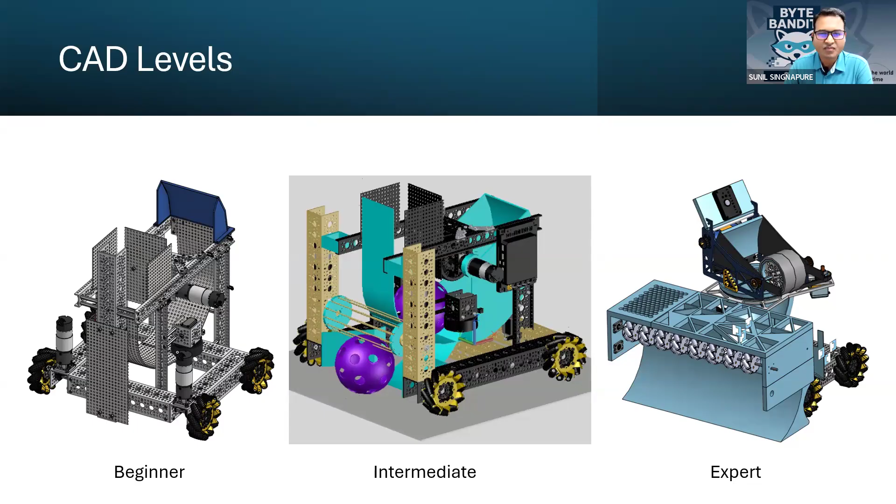So basics of engineering drawing, what it is. It's basically about the technicality, but the most important part at your level is learning to think in 3D. What I mean is, we can see 3D graphics and understand those things, but when we are developing something from scratch, which we have never seen, we have to visualize those things in our mind, like how it's going to look like, how it's going to work out, not the other way around, like, okay, let's make it and see how it's going to look like.

Of course you can do that, but that's a long way, you make it and then you realize, oh no, this is not what I wanted, or this is not what I was expecting. A lot of times it happens with teams, that they design it, but then they realize this is not something that came out the way we were expecting. So focus always on improvising your 3D visualization skills. And D is, of course, the dimension. We'll talk about what dimension means in our case.

So let's talk about drawing. Drawing is the most important part of the entire CAD process or design process, though it is kind of the last part as far as the CADing is concerned. But it is the most important part. Why? Because this is the way everyone communicates.

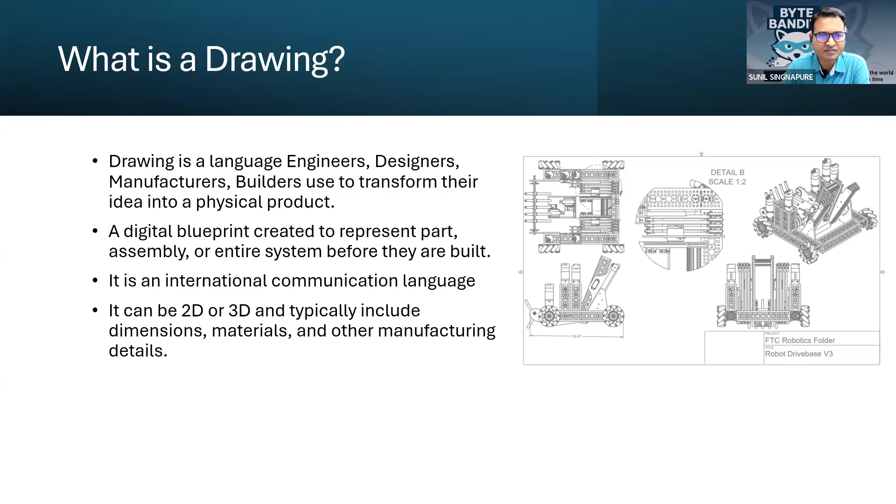I'm sure most of you, or your team, must be working on sketches, something like that. While the sketches are the most important thing, because this is the first place where anything in your mind comes onto the paper. We can have a lot of things in the mind, but unless it is on paper, it's difficult to explain to people what's going on. So making a concept sketch is very important because it is the first step.

Because if you start directly on the CAD or making the formal drawing, it's going to take days for you. But you cannot wait and then at the end of the day realize, oh no, this is not what we were talking about. So making the hand sketch is the easiest way to get started, explain to each other, talk to each other, and then go to the further detailing.

But do you think just the sketch is good enough for us to fabricate the part to make the robot as we want it? No, because it's probably not really accurate to what you might need for the actual CAD, like all the measurements and stuff. Correct, exactly, absolutely.

So the sketch is something that came in your mind and you thought of it. But when we go into the CADing, making it more detailed, we realize, oh yeah, we thought a sketch was going to work out, but when we go into the actual detail, it's not fitting with each other. So that's where the CAD comes into the picture. As a team, to expedite the 3D process, we should start with sketching, but then we have to jump into the CAD in order to get it done in the real world.

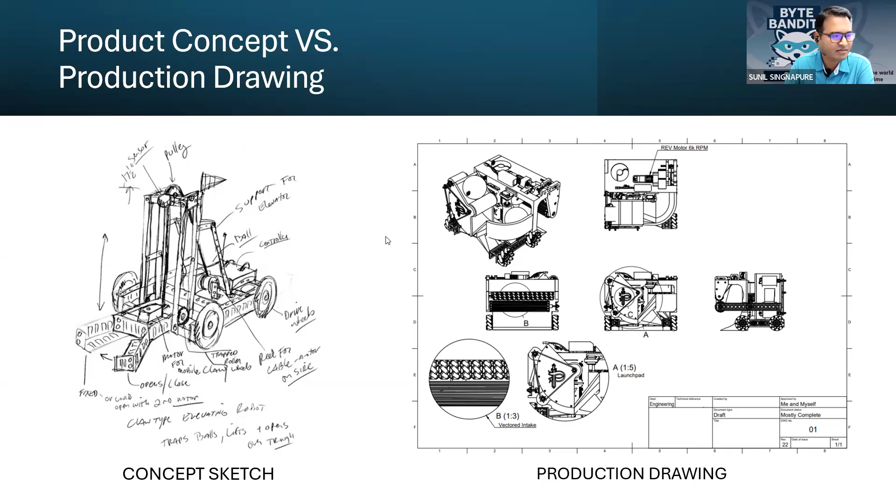Let me ask you, how many of you have heard of the Cartesian coordinate system? None? Okay, anyway, you guys must have worked on the 2D graph system, right? A lot of people must have. Depends on your grade. I think from 7th grade onwards you guys work on the two-axis, two-dimensional graph system.

So how the Cartesian coordinate system works is we have two perpendicular axes. The horizontal axis is called the x-axis and the vertical axis is called the y-axis, pointing positive towards up, negative towards down, same way positive towards right, negative towards left. The intersection of both axes is called the origin, which is 0, 0.

Now the 2D was just a flat paper, right? But in reality, our objects are always three-dimensional. So that's where the third dimension comes into the picture, which is called Z. The Z-axis is perpendicular to the XY axis, pointing plus upward and negative downwards. The same way, we mention any point in 3D space using X, Y, and Z coordinates. In this case, 3 units is in parallel to X, 2 units in parallel to Y, and 4 units in parallel to Z. So this is how we mention where the object is located.

But do you think there's anything missing with it? The other planes, if you can't guess, just... Not really other planes. Of course, those are reference planes that will come later on, we'll cover those later.

But the thing is, like if you've seen in your car, you might have seen the GPS many times, very often. So when your car is stationary, let's say you're in a parking place or somewhere, not really driving, and you look at your car itself, or sometimes you'll see in the GPS that the face of your car is not pointing towards the right direction.

The reason that happens is because it's just checking into the 2 dimension. It's not looking at the orientation of the car. Orientation of the car is determined based on the motion—it knows that previously it was at a particular location, now at this location. So which direction the car is moving, and according to that, it identifies the face of the car. Otherwise, if you're just sitting in the parking lot and you go to the GPS, very often it happens that it's pointing towards the wrong direction. So basically, the location shows you the location in 3 dimension, but it doesn't give the orientation.

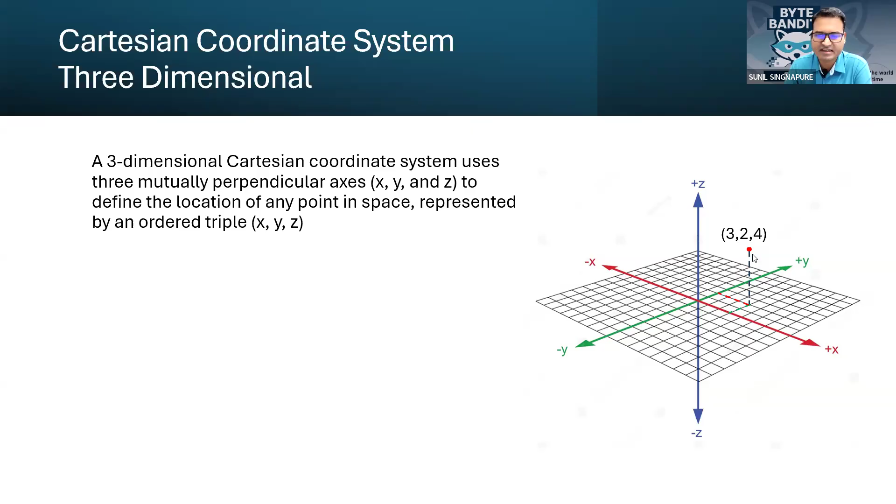And that's where the orientation comes into the picture with each axis. So these, including the orientation, make the total 12 degrees of freedom. How it makes it is right and left, 2 linear movements, same way in all 3 axes. So that becomes 6. And then along each axis, like let's say if you're talking Y, it can rotate clockwise as well as anti-clockwise, right? So that rotation, which is also called roll, pitch, and yaw, makes a 6 degree of freedom, and then linear motion as a 6 degree of freedom. That makes it total 12 degrees of freedom.

So once we know the 12 degrees of freedom, we can easily place our object in CAD. Like when we are placing it, we know what direction we need to rotate it.

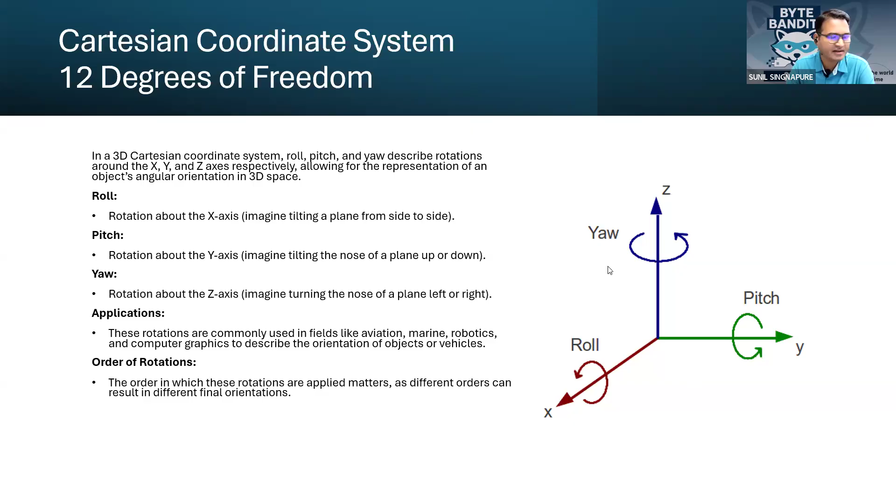So for that, let's go to the next one. A quick exercise for you guys. Can you guys identify which one is solid, surface, or flat? You guys can say it, or you can put it into chat. Just one quick minute exercise. Let me see how many of us can identify details.

Okay, I'll just move on. So give me 1 second. While you guys are thinking, let me just check chat.

All 3 look the same. Yes, they do look the same. That's correct. So what if I say that one of them is a cube, another one is a 3D surface, another one is just a 2D hexagon? You will wonder how they all look the same, right? And it does. So I'll show you some magic here. Isn't it the thing? They all look the same. Now you'll see the magic.

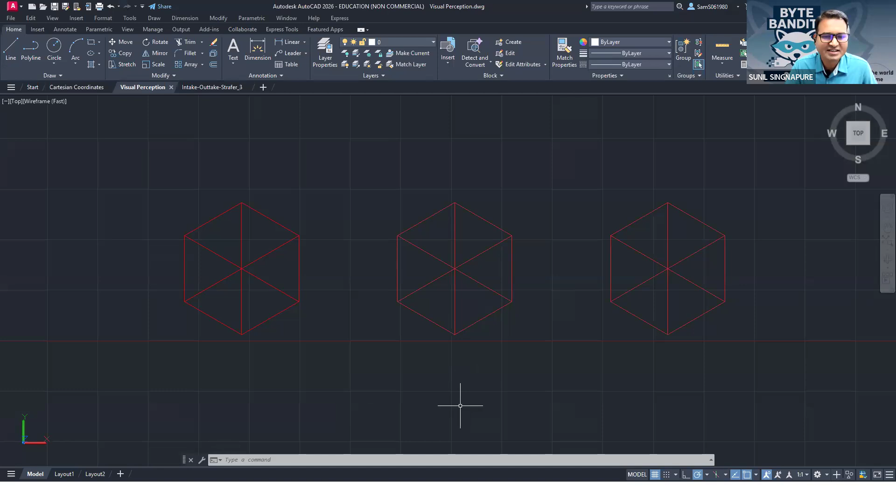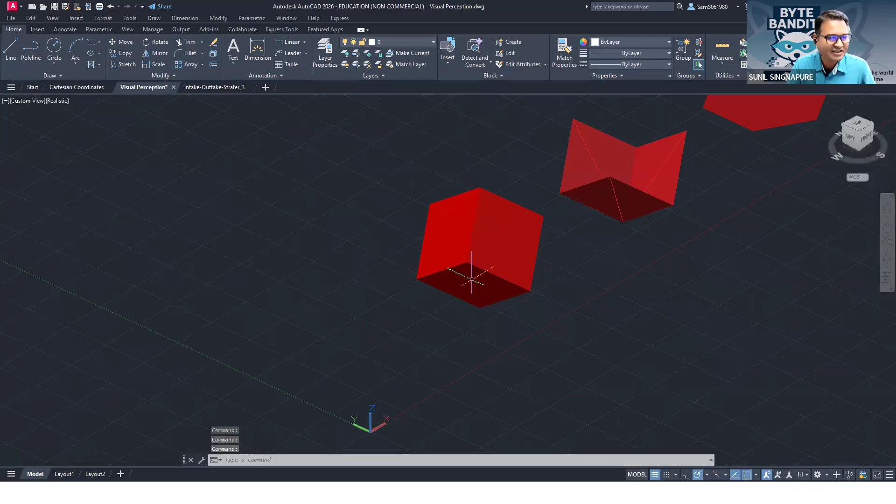One of them is a cube, another one is the surface, another one is just a 2D object. Let's give it a more realistic view. So now you'll see. Do you agree now that this is a cube? This object is a cube. This is just 3 surfaces perpendicular to each other. And this is nothing but one flat hexagon, right? Isn't it good?

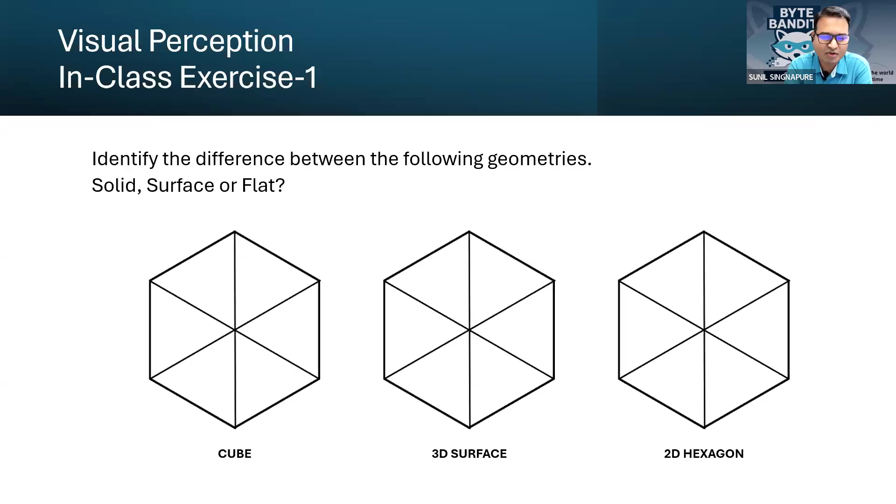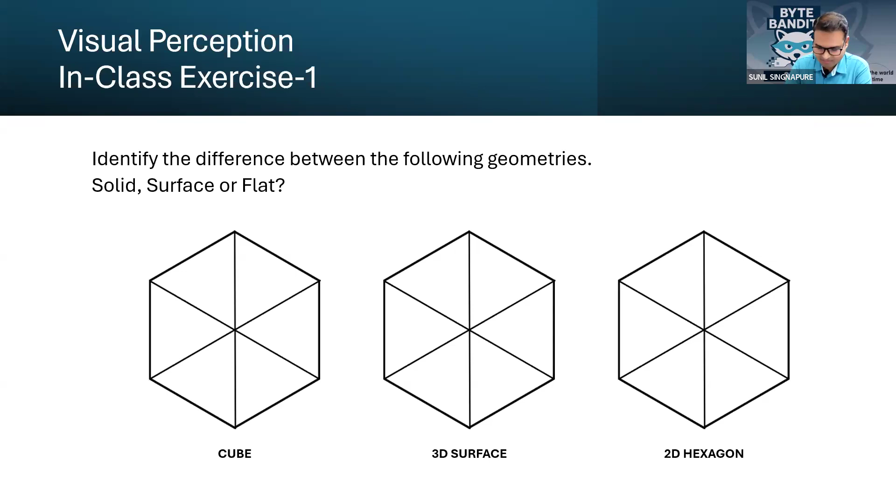So what it means basically is that our eyes need more visual clues to identify the object. Just based on one picture, we may not always be able to identify what it is, right? So we need more clues. How do we get more clues? So let's look at the next slide.

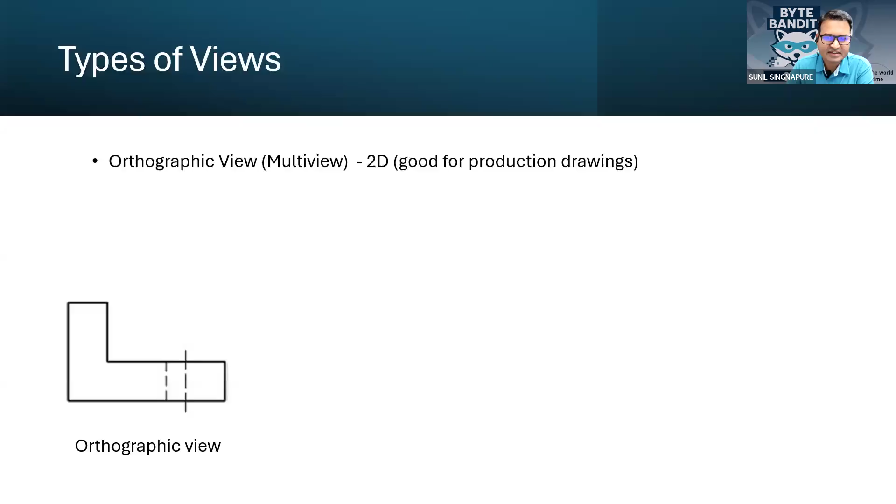So let's talk about different views. Have you guys heard about orthographic views? May not be, of course. So orthographic views are the 2D views, in the 2D plane, like we make a sketch in 2D. Then we have isometric view. So orthographic view, if you look at it, has height and width—just 2 dimensions. While if I look at isometric view, it has length, width, and height. So there are 3 dimensions given. So the isometric gives us a 3D visual effect, while the orthographic is only 2 dimensional.

There is one more, which is perspective view, similar to isometric, but you'll see this is converging, right? So this gives more pictorial views. Now, when it comes to engineering drawing, the orthographic and isometric views are the most common views. Of course, there are more than these views, but we are talking at the moment just about the common ones. The perspective is mostly used in architectural drawing to give your house a real pictorial view before it is actually made.

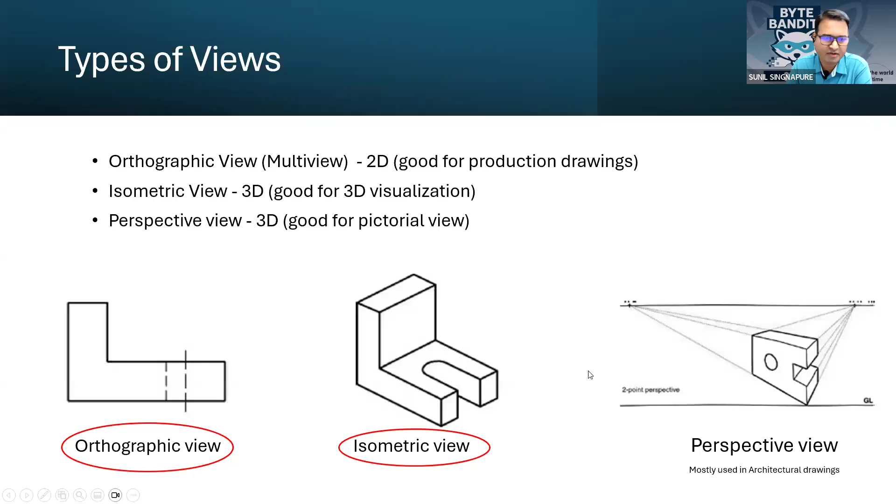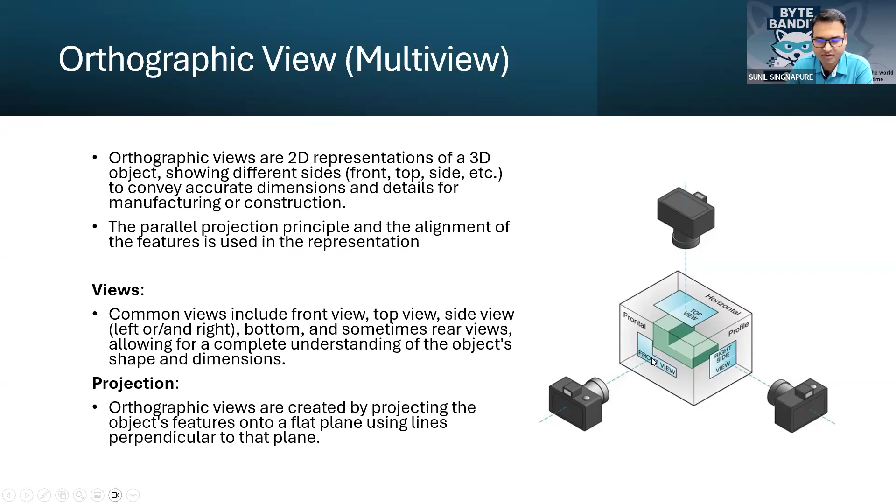These are 2-dimensional views generated directly parallel to the plane. For creating any drawing, you need at least 2 views to get the full picture, if not more. Sometimes 3 or 4 views are required.

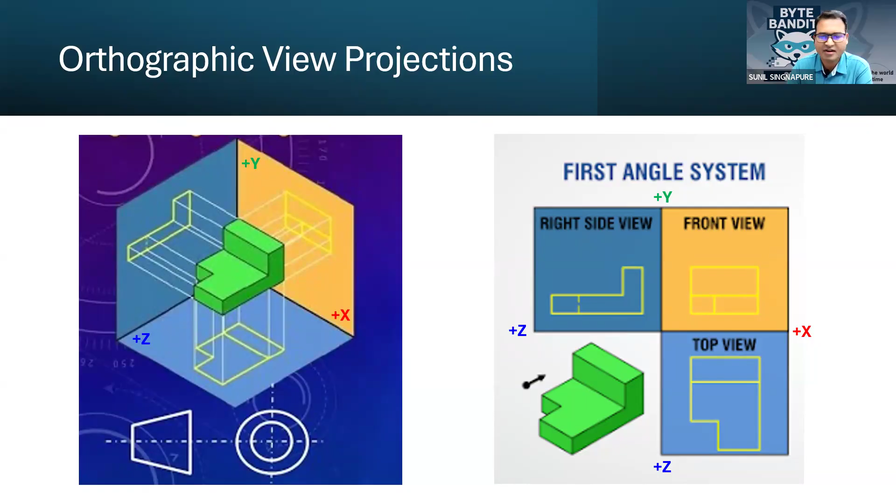Any questions anyone has up to this point so far? No? All good? Okay, great.

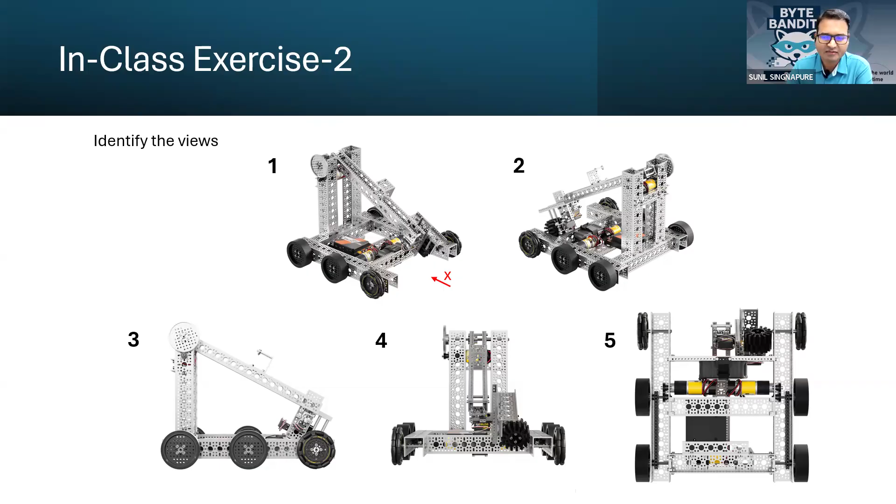The second is also an isometric view. There is more than one isometric view possible - there's northeast or isometric view, northwest, southeast, southwest, and more than that. So multiple isometric views can happen within one object. All right, great, let's move on to this.

Now, how to create these orthographic and isometric views we talked about? There is software available for it - if you want, I can tell you and you can register. It's also available for students free, but you need to register. For students who don't want to register for software and just want to practice orthographic and isometric views, I've placed a link, or you can do a Google search. You can download orthographic graph paper, which is just straight horizontal and vertical lines equally spaced, or isometric graph paper, which has 3 lines - you'll see 1 line, 2 line, and 3 line equally spaced. This is after class, you can do that.

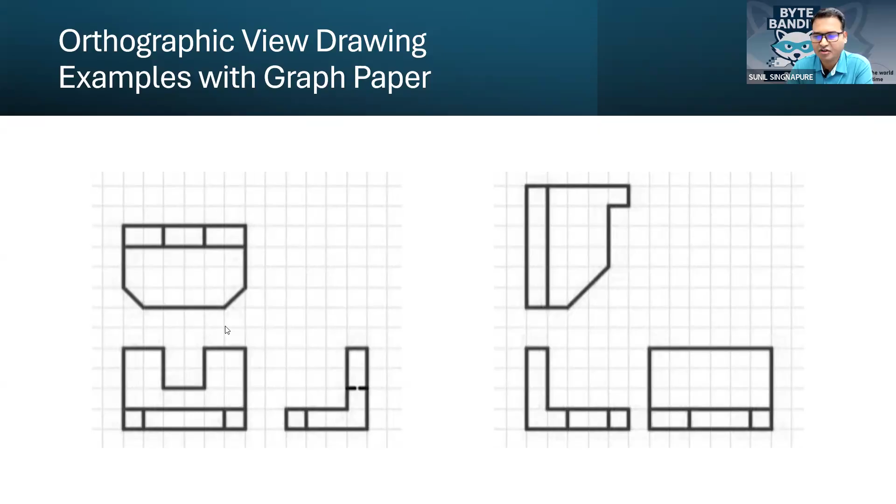So if you were to draw a set of orthographic views, this is how you can draw. For example, let's say your width is 6 - 1, 2, 3, 4, 5, 6. So this is your width, and so on. You can take a measurement, or you can go with an interval, like each square is either 1 unit, 2 units, 5 units, or 10 units, depending on the size dimensions given in your sketch. That's how you can draw orthographic views on graph paper.

Same way on isometric paper, this is how you can draw. So you can see that though it's just paper, it's in 2D, but it gives you the 3D appearance. This is how you draw. If your width is, let's say, 6 units, length is 8 units, and the height is 8 units, this is how you will draw and make a cube, or something a little bit more complex.

So these are some simple exercises I have given here, and I'll give you the copies. You can just send me an email separately after the class, and I'll send you the copy of this presentation so you can refer to it and practice it. But these are the simplest ones - you can at least get it going and practice all the different views.

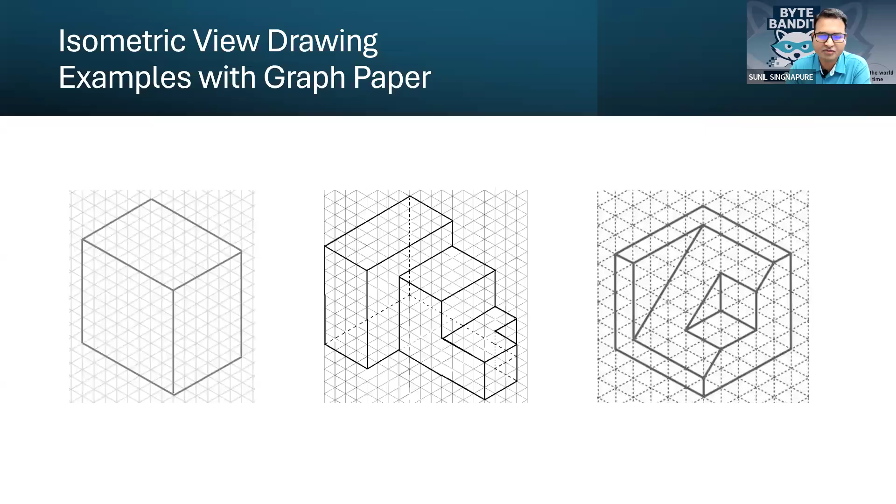Of course, we do much more complex than this, and these are the after-class exercises. Basically, you will use this ISO view to generate its orthographic views. Same way for this, and you will use these orthographic views to generate an isometric view for this. Feel free to try after class and let me know what you come up with. You can send me your work, just take a picture and send it to me - I'll be glad to give you feedback on whether it's correct or not.

So with that, the basics of engineering we have covered. Anyone have any questions so far? Is it a little bit going over your head? Are you guys with me? Was it clear for you guys?

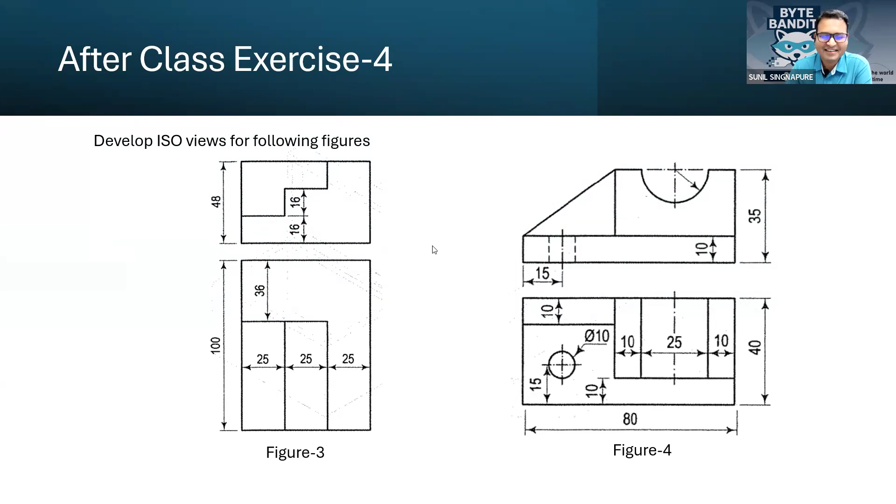Okay, no worries. So let's go to the fun part, which is Onshape.

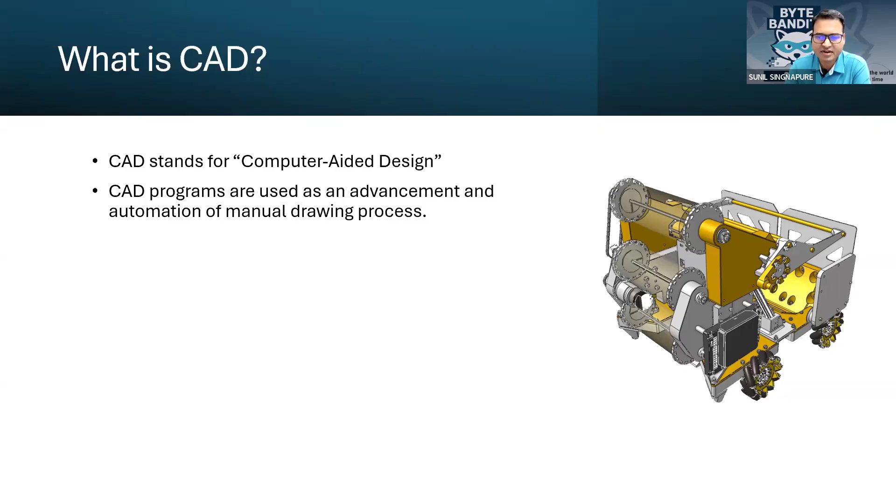So what is CAD? CAD stands for Computer Aided Design. Was CAD always there? Not necessarily - in the past, when there were no computers, there were no CAD softwares. People used to do all this on a big drawing paper. Everyone was drawing by hand - everything you draw today on a computer very accurately, everyone was doing by hand, all measurements and everything. But since computers came, there was advancement and development into CAD software, so CAD softwares came into the picture, and that's how we are doing it now.

Onshape is not the only CAD software - there are many more, like Tinkercad, Blender. These are simple go-to starter ones, and they're free. Onshape is the very balanced one in between all these things. Then there's more advanced ones like Fusion, SolidWorks. There's AutoCAD, which I was showing you just now, the 2D one - the black screen, that was AutoCAD. Then there's FreeCAD, SketchUp, and many more, countless CAD softwares. Every CAD software has its pros and cons depending on your usage - some are suitable for a particular purpose, not others. So yeah, there are many CAD softwares, but we'll just talk about Onshape now.

Have you guys heard about Onshape before, by the way? Okay, so great. Yeah, all right, cool.

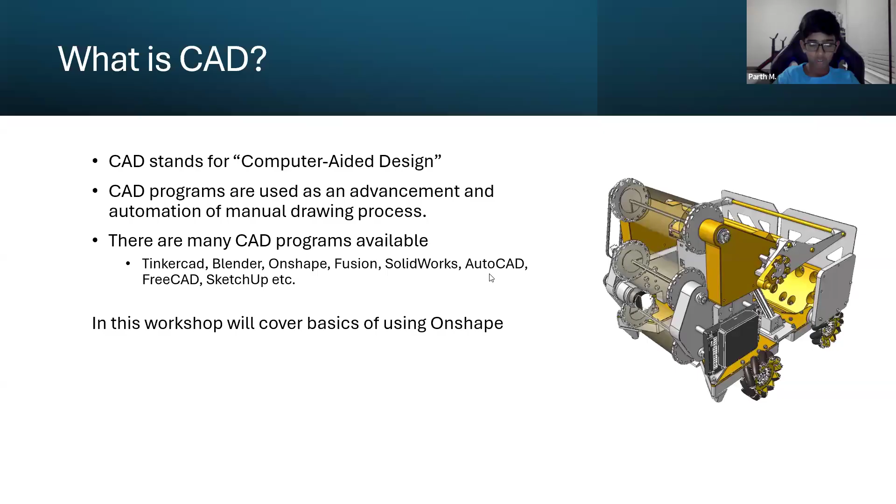So let's dive a little bit deeper into it. Why are we talking about Onshape only, not the other software? Because first thing, it's free for students or educators - all you need to do is go online, register for it, and then you can start using it. If it's professional use, you have to buy a license, but not for education and student purposes. Compared to other CAD softwares, it's easy to learn - so basically for your level, for FTC, FLL, FRC levels - there may be some FRC people here.

It is easy to learn. It's not that complicated, and it serves the purpose of what you need for your design.

Second thing, it's cloud-based. A lot of CAD softwares are desktop-based, so you have to download the file and install it on your desktop before you can use it. The good part with Onshape is it's cloud-based.

So anywhere you are, even on a long drive, as long as you have your laptop and an internet connection, you can just log in and get going.

It's so fun. Once you start playing around with it, making your own things, you will realize how fun it is to play with it. It's just the first step that is difficult, and that's where I come into the picture.

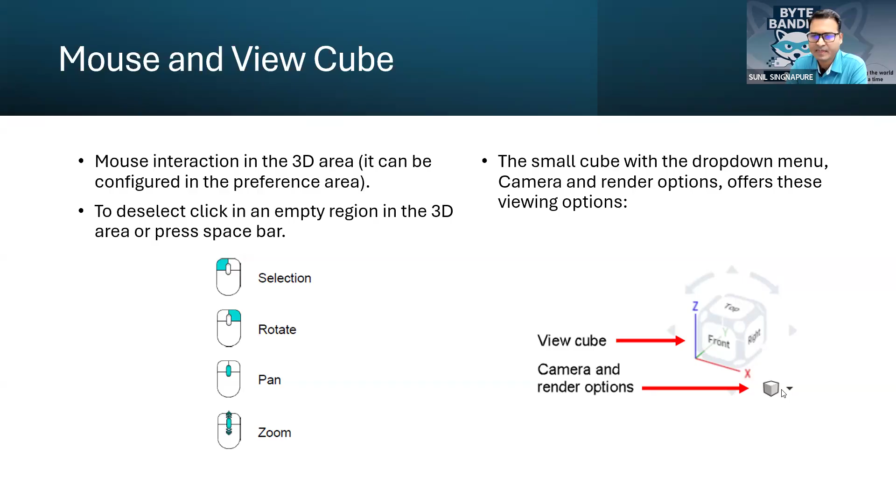And you can also see the X, Y, Z axis, which we just talked about. You can press on different areas of the cube and it goes to preset views. There are some camera and render options which we don't need to talk about, but I just wanted to give you an idea.

Someone is saying they have a mouse and keyboard for the iPad, so that's perfectly fine as long as you can use it. It's great. Just try it yourself, and if it works out, wonderful.

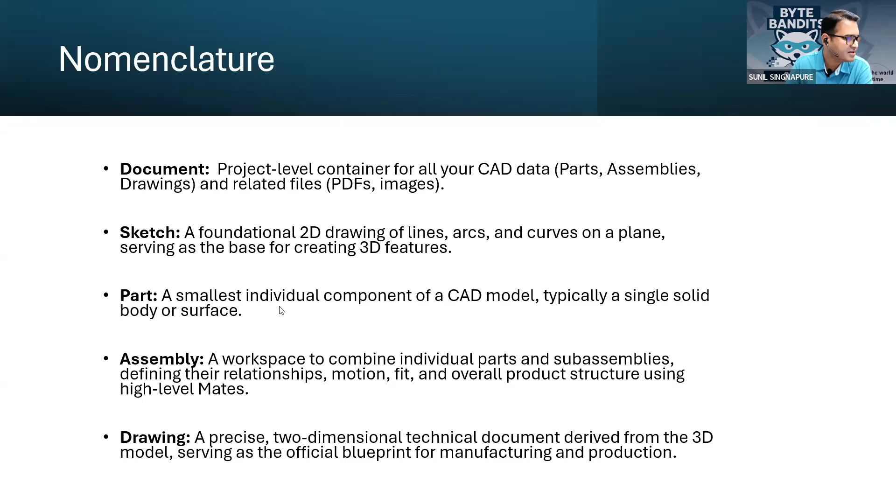Now let's look at how documents are organized. We have document level, top assembly level, sub assembly, and parts. With multiple parts, you can make sub assemblies, and with multiple sub assemblies, you can make a top assembly. For example, a robot has an outtake and intake, which could be two separate sub assemblies, each containing multiple parts. You can also import parts from public libraries or from other parts of the robot instead of making them yourself, if something already exists.

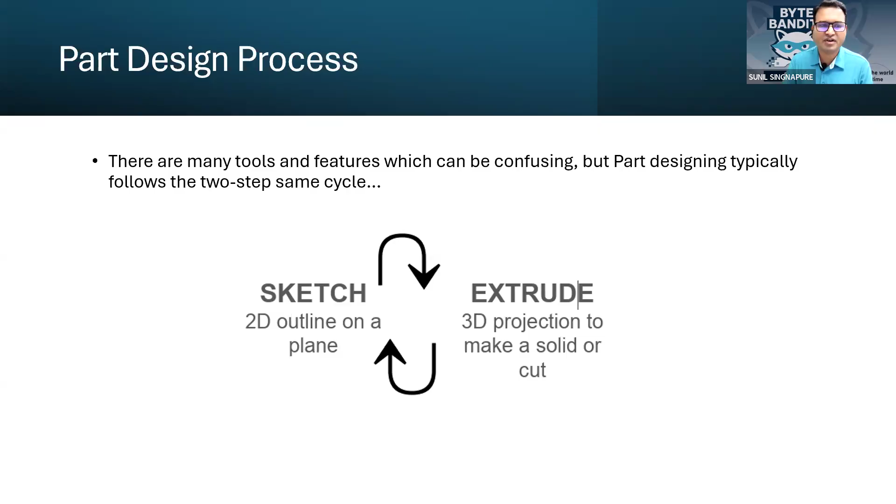Now let's look at how part design works. I'm going a little fast, but this is just an introduction because I want you to work on it yourselves. One part can have different solid objects or solid surfaces. The way it works is you keep making different sketches and extruding them within one part—sketch, extrude, sketch, extrude—and that's how you build the part.

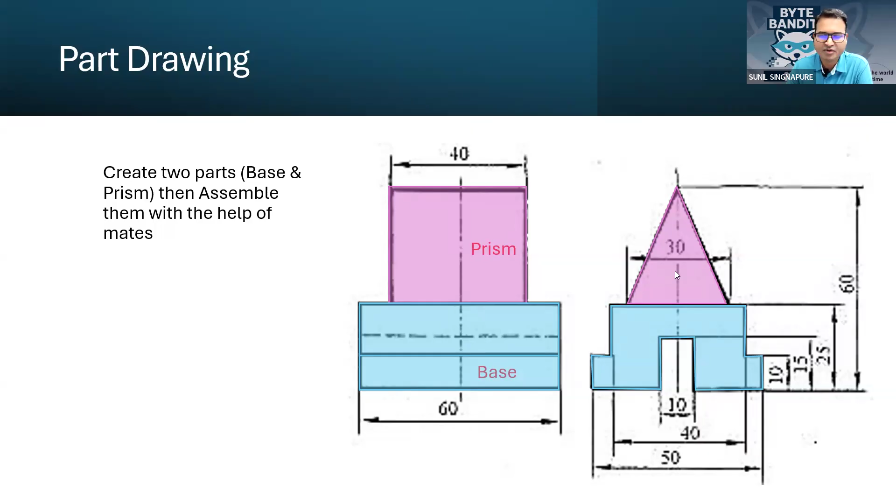So what we are going to do is a very simple exercise, simple even for a beginner. All we are going to do is create two parts: one is this triangular prism, and one is this blue base, and then we are going to assemble it. Let's move on to it.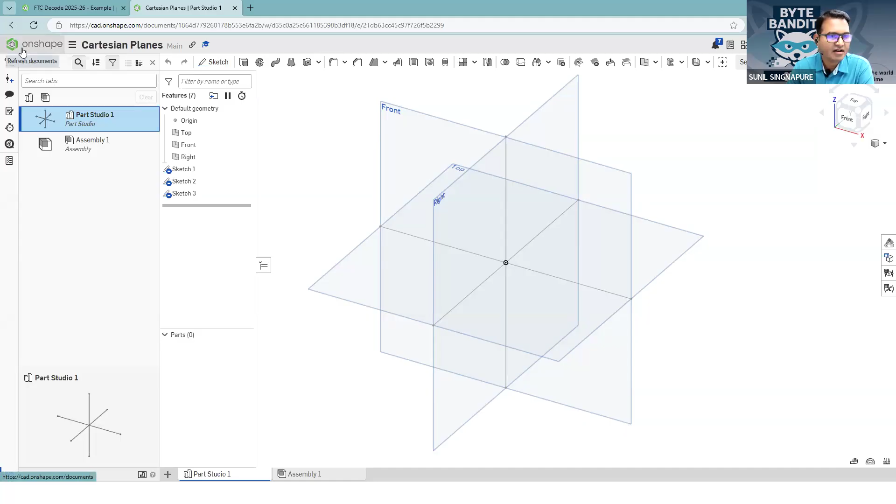First, just click on the Onshape icon and click create. Use the drop down arrow, click create, then click document. When I click document, this comes up, and you can create that document in different workspaces—I'm creating it in 'owned by me' this time. You can give it any name, let's say 'class exercise', then just hit create.

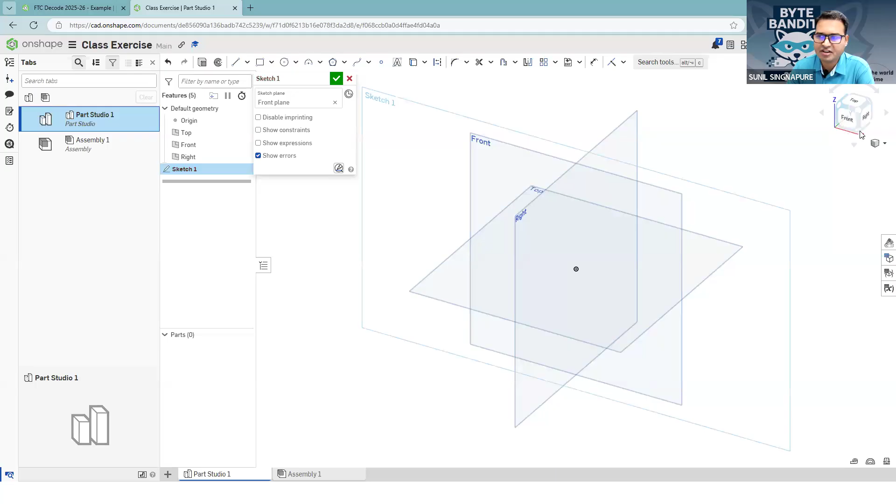Let's move on. We just talked about this sketch, right? This was the sketch toolbar. So let's go back, and the simplest thing we're going to start with is the prism. Let's click on sketch, and it asks you to select the plane. I'm going to select the front plane. For quick navigation, on the view cube you can just click on the front view—there are shortcut keys to directly activate that plane, but I'm using the cube intentionally so you can see what feature I'm using. So you click on it, and then start making your triangle.

We're going to use the line command for this. Let's start from here, click, and just go random—you don't have to be precise—close the triangle. As per the exercise, the base of this triangle is 30, and the height is 60 minus 25. Let me pull this up for you to look at quickly: the base is 30, and the height of the triangle is the total height, 60, minus 25, which makes it 35. So the height is 35.

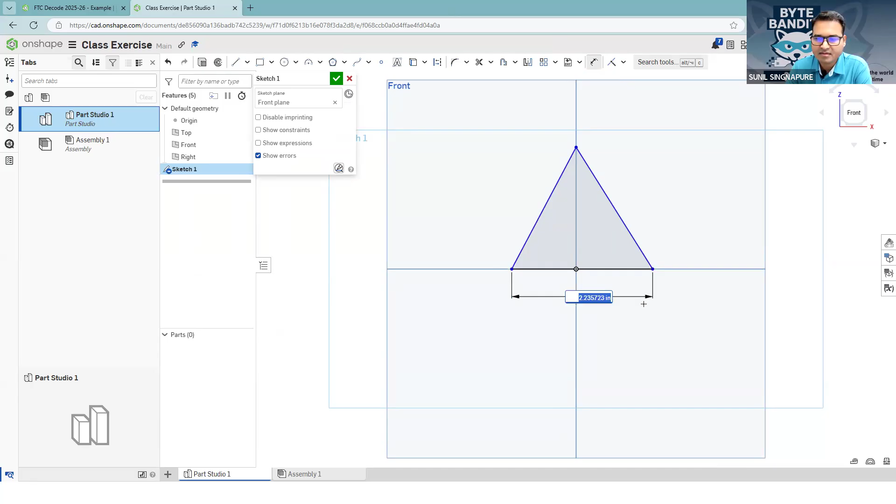So we're going to use the dimension tool. Just make it 30. Then use another dimension, make it 35—it may not be equal on both sides, so I'm going to measure from the center to this point. Oh, that's why it's not picking up. I can make it equal.

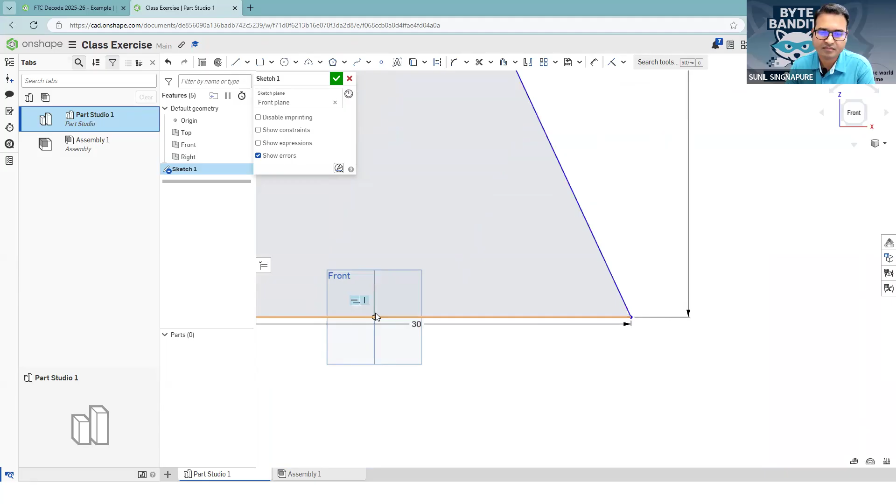So you guys have your triangle ready? Let me know once your triangle is ready. Once it is ready, what we are going to do is just click the green check mark.

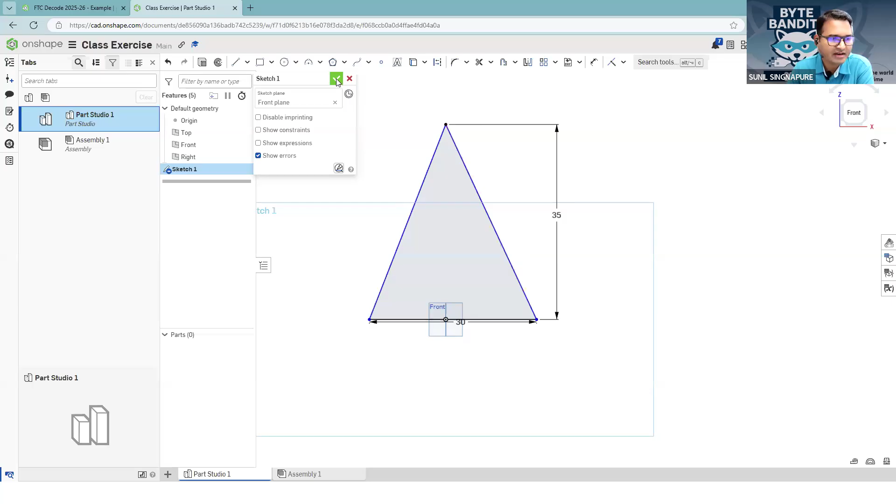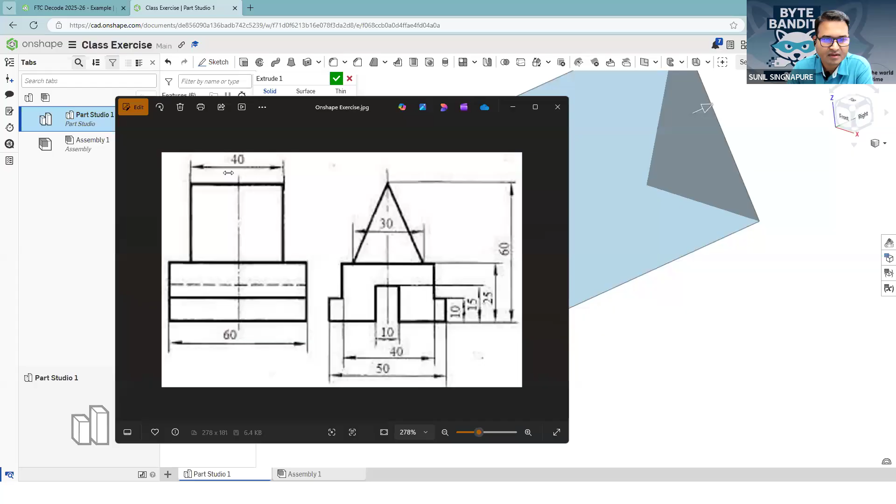Okay, and then I'm just going to tilt it with my right click a little bit, so you see the flat triangle. Then I'm going to use the extrude command. Select my sketch, it shows this direction, which is fine, or I can change the direction like this. Use the length of our triangle, let's look at what it is, which is 40 in this case. 40, okay, not 60, I was typing 60.

It's 40, okay, so that's it. If I want, I can rename this triangle as a prism, so this file as prism, but I'm just leaving it for now. Then just click it, this. So if you're able to make this one, congratulations, you just made your first object in Onshape.

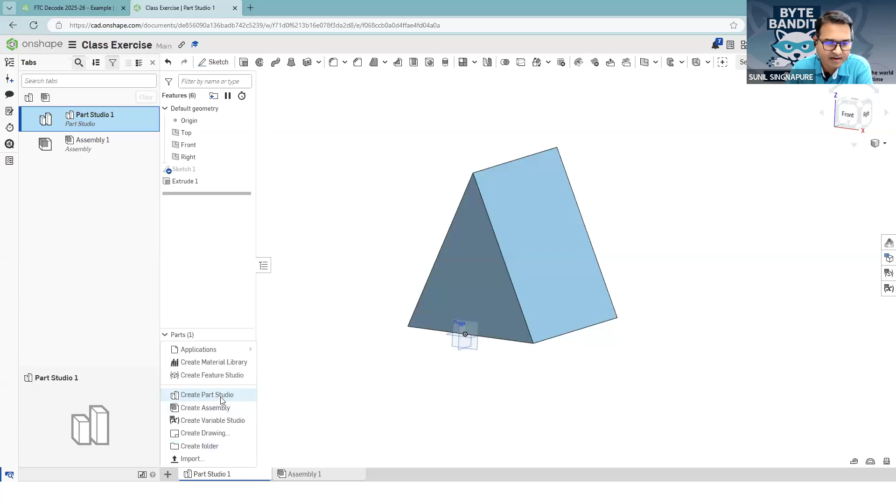Now what we are going to do is go to another part studio. Just go and create another part studio, because this is one object. Now we are going to the second one and we are going to make the base. Again, just keep in mind the shape of it. I'm going to go the same process. Select this front view and then draw the shape.

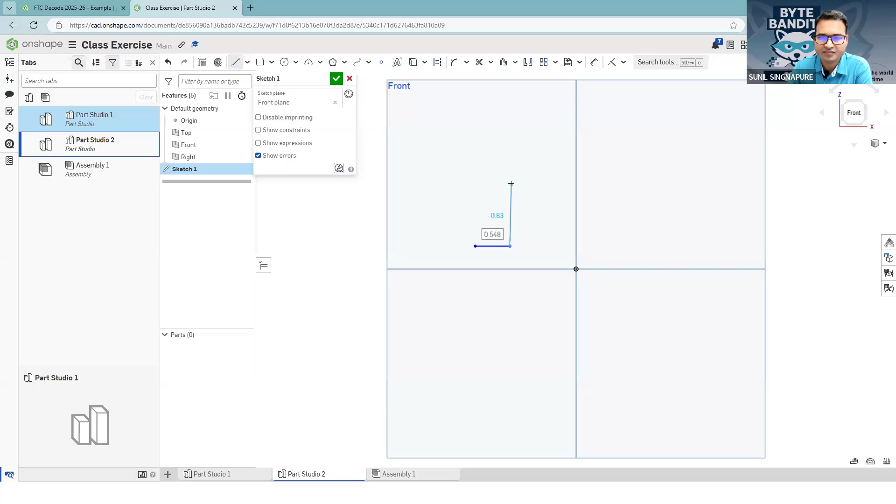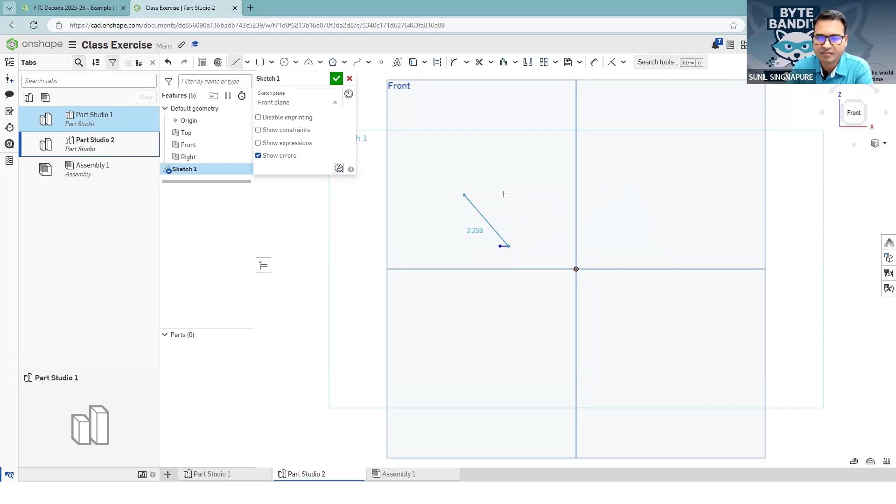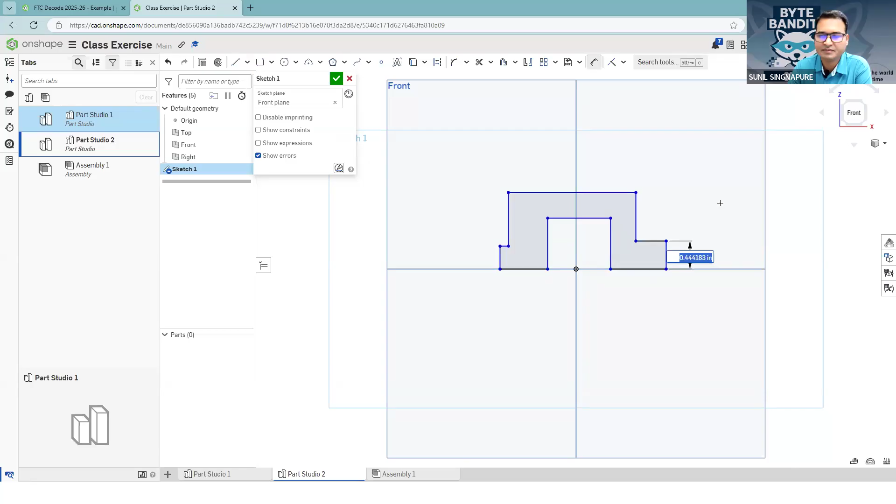So let's say I start from here. Oops, sorry, I made a mistake. Okay, same way we are going to just give the measurements. There are a lot of shortcut ways, but I'm intentionally following the long way for you guys so that you can understand. So we have this is 10, 15, and 25. So that's what we are going to do, 10.

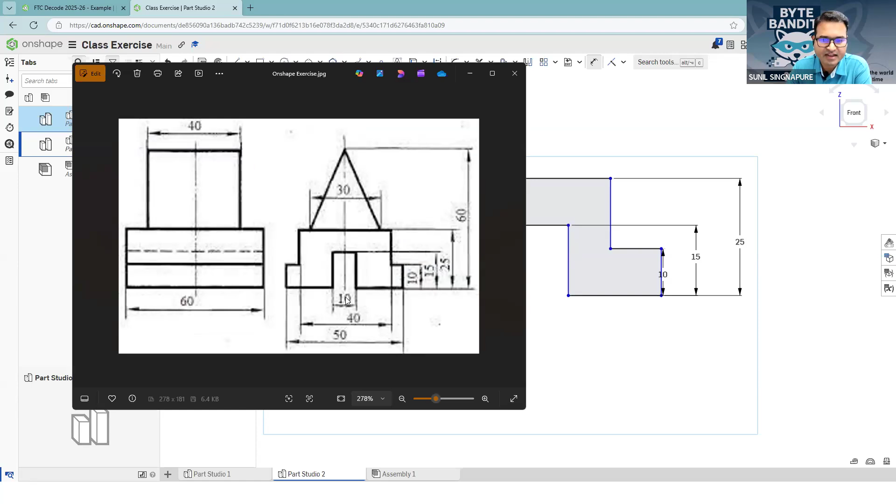Okay, and let's look at the other measurements. So we have this one as 40, and this was 50, and this is 10. So let's just do that.

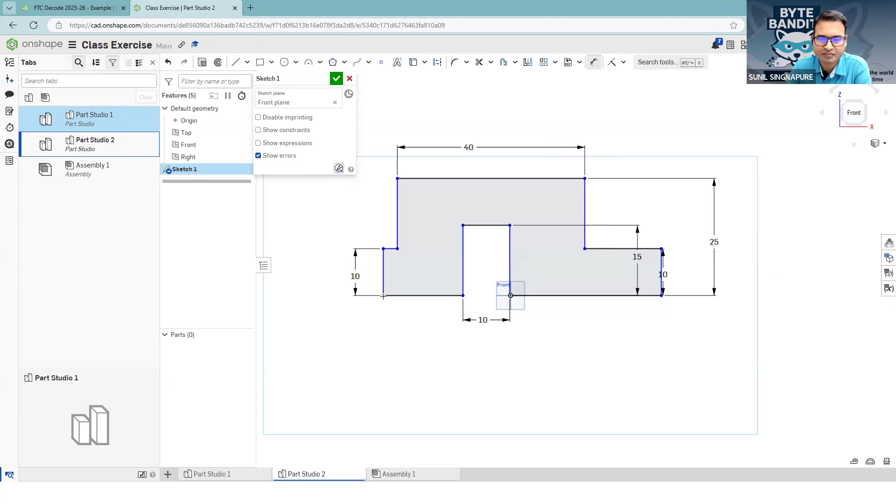How much was that? Was 50. Okay, now we just need to make it equal. You can see the measurements are there, but they are still not equal, right? So again, I'm just going the long way intentionally. This was 10, so that's the 5 halfway and the 25. So this should be your 20. And this is 20, this is automatically 20.

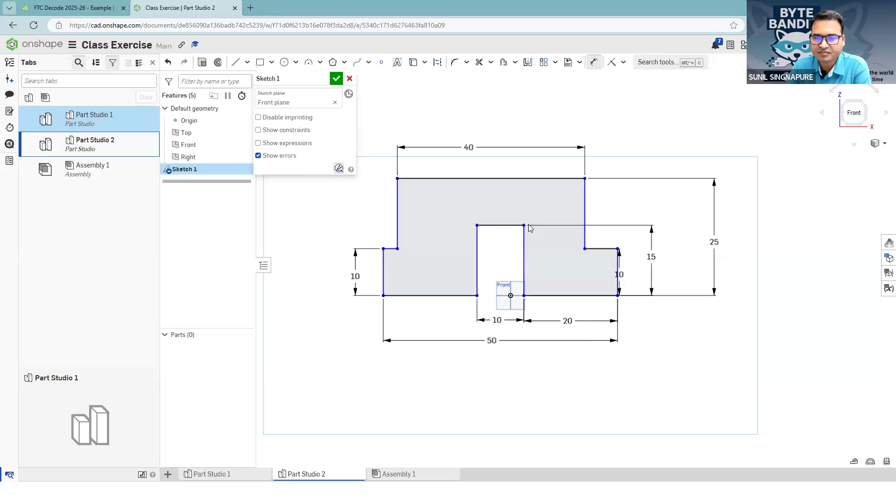Same way, this should be 50. Okay, so this is how your sketch is done.

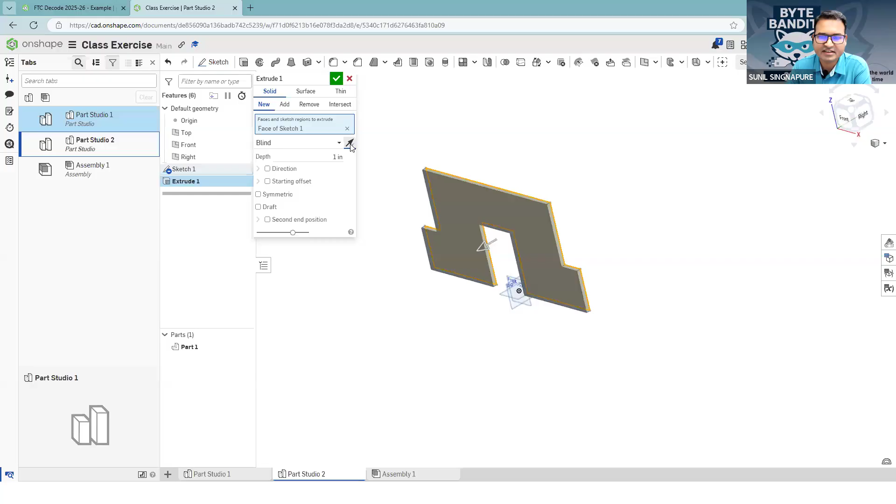Just click OK, again tilt it and then go to the extrude. Click on this, if you want to change the direction, fine. Make it 60, so this is done. Okay, click OK. So your part 1 is there, your part 2 is there.

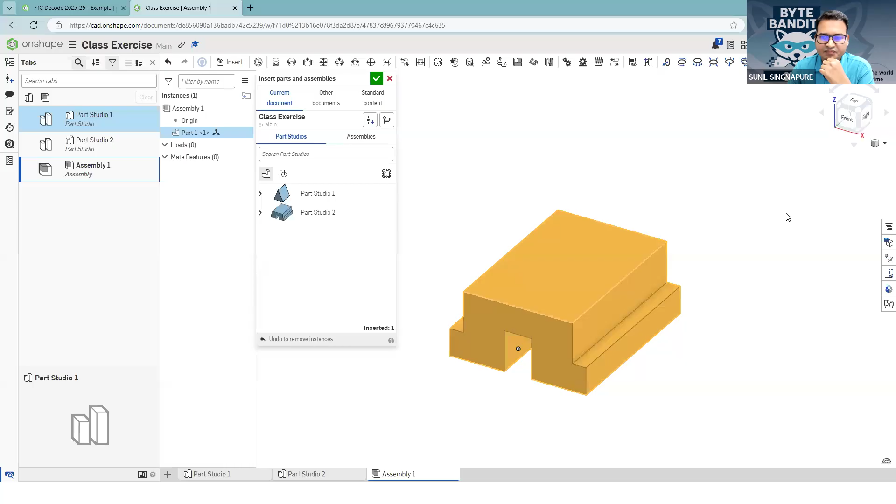Then we'll go to assembly. Now what we are going to do is insert those. There are many places you can insert, but we are just going to current document. We are inserting part 2, which is this. It's very easy. Then you can go insert your part 1. Just randomly you can insert anywhere, you don't have to be accurate. So both the objects are there.

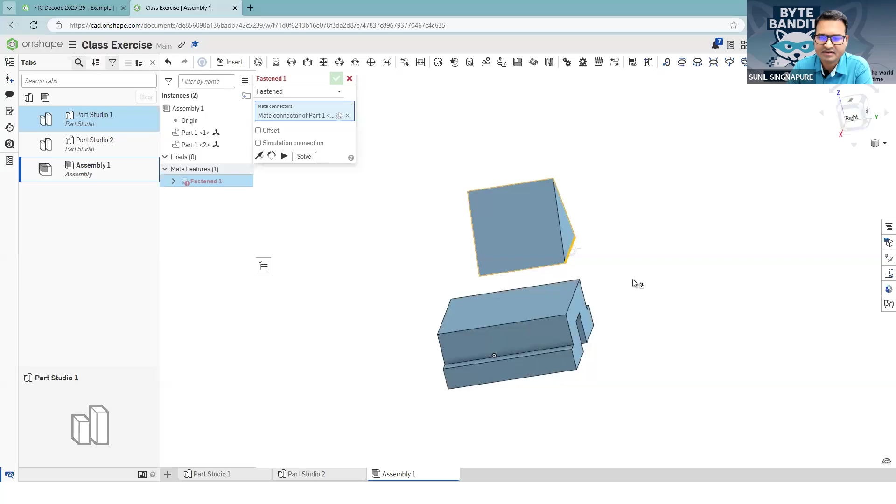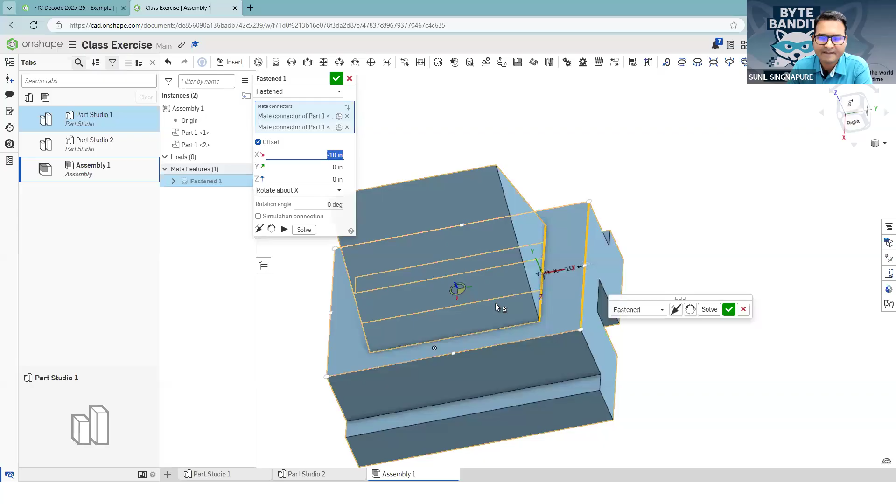But if you look at our picture, right, is it towards this edge? No, it's in the middle of it, right? So if this is 40, this is 60, that means this is 10, right? So we need to create an offset. How we do that is just click on the offset button. And what is this direction? This is X direction, so I'm going to type -10 and this. So in the X direction, I've used the -10 offset, and there you go.

You can just click this ISO view, you can look at front view, you can look at other views, and then play around with it. So congratulations, your assembly also done. Again, if you're not able to finish it, that's perfectly fine. You can do it after class.

And if you need any help, feel free to reach out to me. Or how is everyone doing? Anybody needs any help? I see a lot of messages. Sorry, I was not able to catch up with the messages. Okay, so someone is saying they don't have audio.

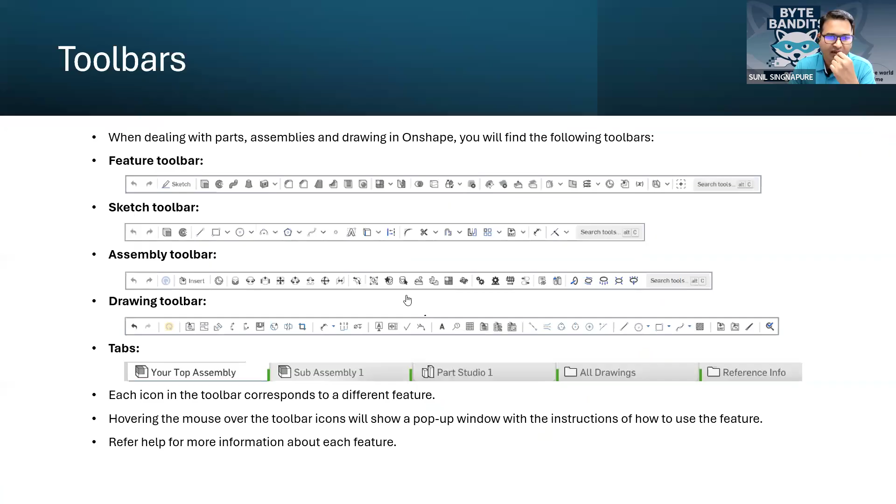I believe we've covered pretty much everything, including sketching, creating parts, and assembly. Another thing to cover is 3D printing, which is pretty simple. All you do is go to the assembly views or part studio.

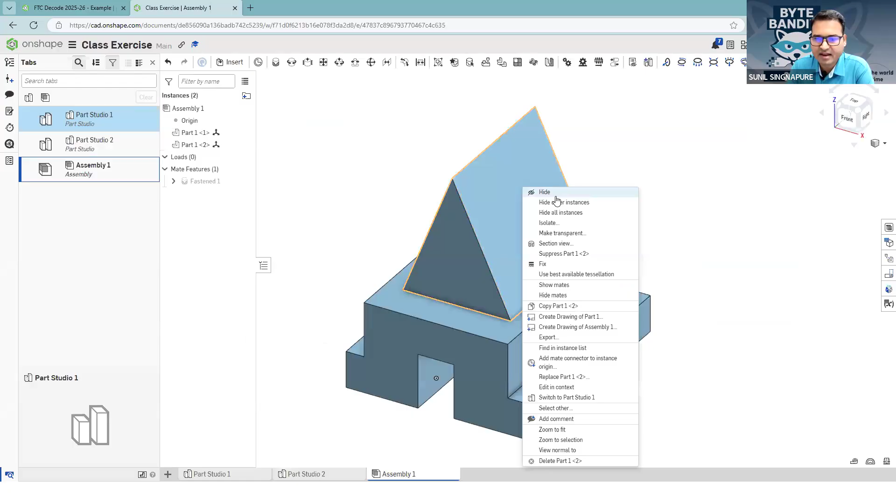You right click the object and click on export. Once you click export, you should know what files your 3D printer supports, since different printers support different file formats. STEP is a pretty good file that most 3D printers support, otherwise there are formats like STL, 3MF, and ACIS.

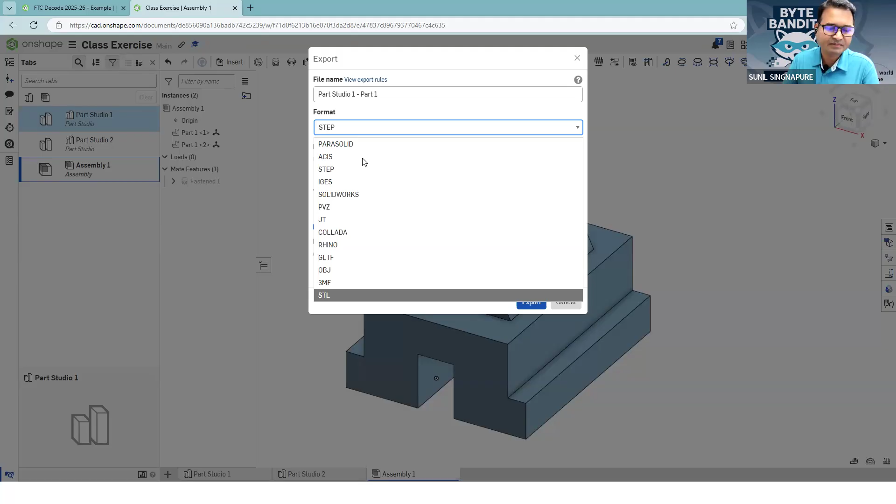If the format your 3D printer uses isn't available, you can use an intermediate converter. Export into STEP file, then use a converter to convert from STEP to the file format suitable for your 3D printer. So we are good with the exercise now.

My key tips for you guys to continue this work: first, work on orthographic isometric views because that will give you a good grip on the X, Y, Z axis Cartesian coordinate system to visualize it. It's most important to understand the methods, the nomenclature, and the 3D visualization.

Once you're good with it, it'll be just a cup of tea for you guys. Trust me, it's going to be very easy once you get hold onto it. It looks a little difficult at first because we've never touched it, but don't worry about it.

What else do you need to do? You need to learn more about the components. The more you know about how each component works, the better. For example, a motor takes most of the load, so it needs a stronger structure. A servo motor is just for small support, so it may not need that stronger support. You need to understand the different aspects of robotics design, like how different parts work and what kind of loads they can act on your robot.